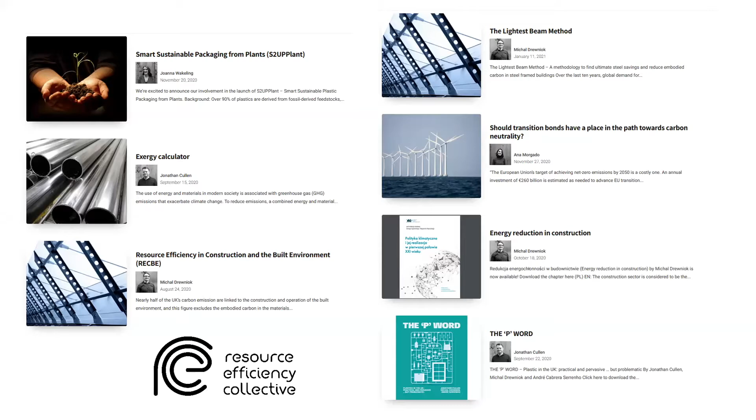We have a website, the Resource Efficiency Collective, and there's quite a lot of information on there about RECBE. If you find the one down the bottom left there, you can click through, and we have all of the slides and talks from the previous meetings up online.

The idea of this, we launched it in 2018, was really about just bringing together academics, companies, people in the construction and built environment space to talk about interesting research and what's going on, to do these workshops a couple of times a year, and to build collaborative research projects between people, not in a particularly organized way, but just by meeting people.

And lots of companies represented, many of you who are on there. Apologies if your logo isn't on there, but lots of companies working with us.

Agenda for today: welcome from me, and then we're going to move straight into hearing from Velenturf and Poole, doing some discussion after that. We've had some speakers drop out because of COVID, as Michal said, so there's a bit more time for discussion at the end, so that'd be great.

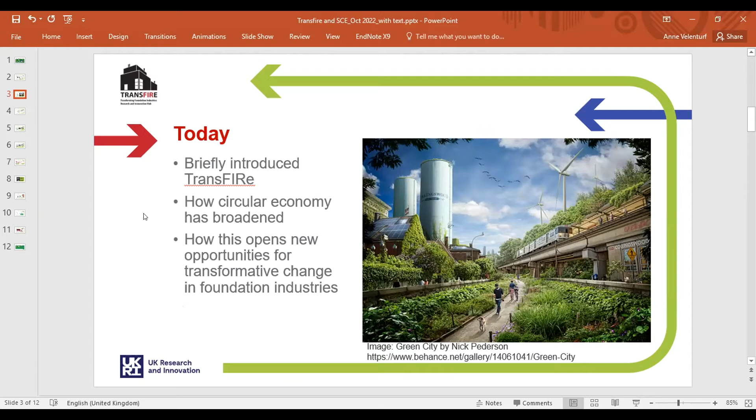So today I'll speak about what this transformative change includes from a circular economy perspective and what opportunities such transformation opens for companies. Circular economy has been defined in as many ways as there are people working on it, but there are a few commonalities, thankfully.

It's of course the opposite to a linear economy, in which we take things from the environment, make something from it, use it for a short while, and then dispose of it, often in unsustainable ways. In a circular economy, we aim to make better use of those materials, components, and products that we make from them.

In my view, that has to include minimizing resource input from the environment, maximizing waste prevention, and then optimizing environmental, social, material, and economic values of products, components, and materials throughout their consecutive life cycles.

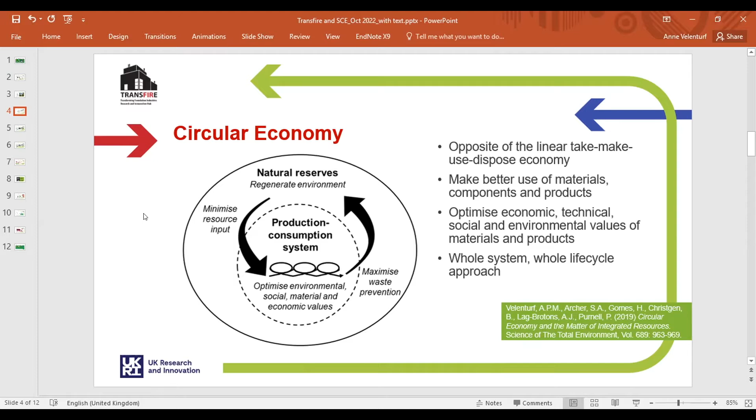So when we say optimizing, we're doing that usually for some purpose, and in a sustainable circular economy, that purpose is to increase social well-being and environmental quality while maintaining economic prosperity.

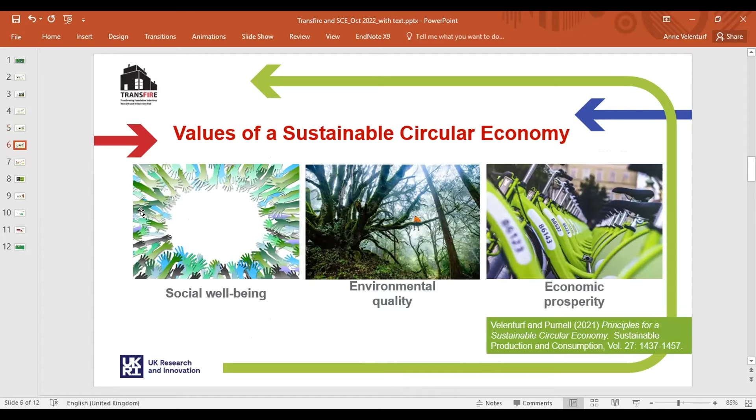And if we do that, there are lots of benefits we can realize together. For example, in the UK, we could generate nearly 500,000 jobs by 2035. Many of these, about 300,000, would be in remanufacturing. Whether we will get there with this government, I suspect it will be heavily thrown off track, but hopefully it will still be possible if we get a different political climate.

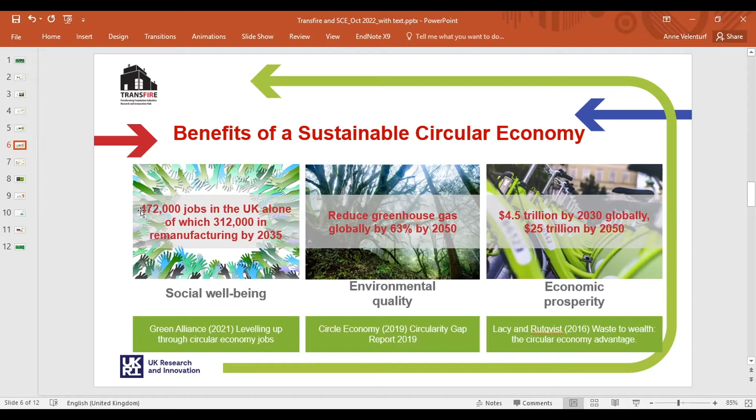There's also high potential to reduce greenhouse gas emissions globally—it could reduce by more than 60% by 2050. And it can generate very substantial business opportunities. Now, these estimates vary greatly, but in any case, they are incredibly substantial. That is certain.

So circular economy can be implemented through a number of different groups of strategies. The first is about narrowing resource flows—reducing the amount of materials we have in society as a whole. We can achieve that through better design, for example modular design, design with less materials, but also shifting to business models where, instead of selling products, we rent them out or share them.

Then there's slowing resource flows, which is about extending the amount of time between when a product is produced and when it goes to waste. There are various actions we can take there, such as component reuse, repair, remanufacturing. There's a whole list of dozens of R strategies, but I think these are the most important ones.

Then there's closing loops of resource flows, which is essentially about recycling materials and strategies such as industrial symbiosis. It's also important to recognize that it may not be possible to keep circulating resources within our society sustainably forevermore. Sometimes we'll have to reintegrate materials into natural processes, and that has to be possible in a safe way—that is what the last group of strategies is about: reintegrating resource flows.

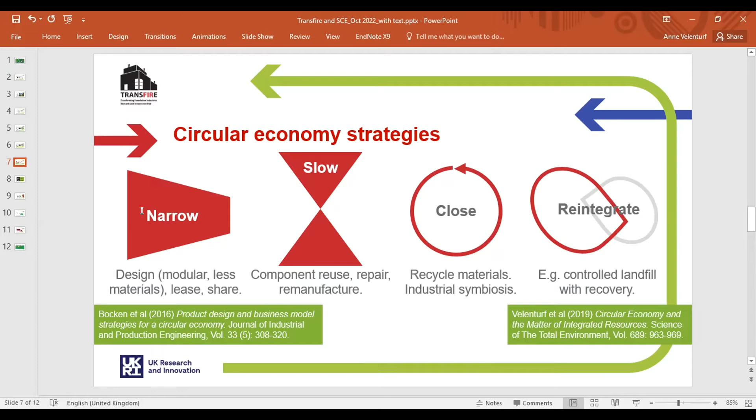Within the circular economy community, there has been a tendency to focus mostly on recycling, unfortunately. While these strategies will help improve current production and consumption practices, and fit well into a focus on increasing resource efficiency with new technologies, while that is positive, it largely leaves production and consumption processes unchanged.

And with a belief that economies can continue to grow, but in a green way. Green growth relies on decoupling resource use from GDP growth. But scientific evidence has shown that decoupling is not happening sufficiently, it's not happening fast enough. In other words, empirical evidence suggests that green growth is very unlikely.

As a result, a growing part of the circular economy community is looking to enable deeper transformative changes to our economy and our behaviors. The key difference between those mainly focused on recycling and those aiming for a sustainable circular economy is that the latter have added a major focus on dematerialization.

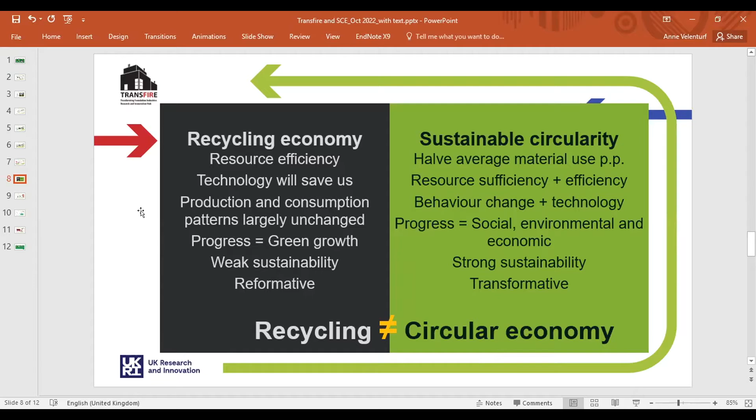Given that 75% of the materials in our economy come from foundation industries, the impact on those industries can be really substantial. But remember the massive opportunities I mentioned earlier in terms of business opportunities, jobs, and for the environment. So TransFIRe is supporting a shift in gears in the foundation industries from reforming to transforming, as indicated on this image.

We do support reforming of practices, because this is what we're starting from. We're doing that by minimizing resource use in manufacturing processes and supporting innovative industrial symbiosis. These are mostly technical changes that can substantially improve the current models of production, and that is really important too.

But at the same time, it's important to continue to move towards transformation as well, in which we are rethinking more radically how we can change our production and consumption models. It starts from asking, why are we actually producing and consuming in this way? Can our needs be met in a different way while generating more value for people and environment, while maintaining our economy?

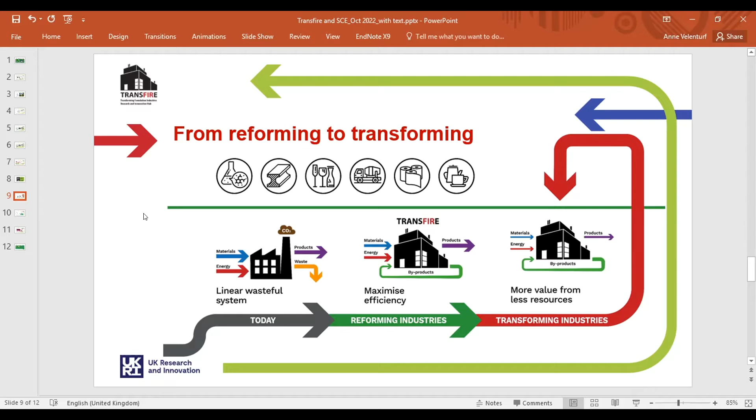Based on extensive cross-sector context analysis that we've carried out with the TransFIRe team, we found that investment is one of the major challenges for transforming foundation industries.

Currently, foundation industries in the UK are competing globally, producing against ever smaller margins, and this leads to a race to the bottom. There's a lower likelihood of investment in UK sites, for a number of reasons. Sites tend to be older and less productive. Trade arrangements are uncertain. Costs can be higher due to stricter regulations and energy prices. And capital availability can be low in the UK, while innovations in the foundation industries will cost billions just to modernize sites in the UK alone.

It seems unlikely that UK sites will outcompete sites in, for example, Asia or mainland Europe, under the conditions of sticking to the same business model. In other words, staying on the same pathway by only reforming practices will postpone loss of foundation industries in the UK, but it will probably not stop it.

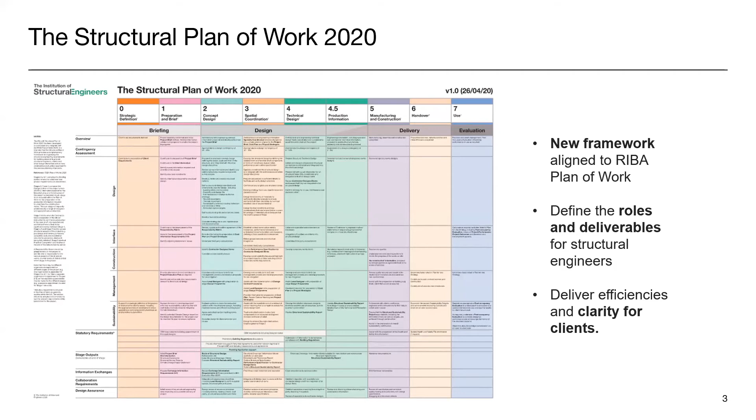It's a template report to add project-specific information based on work undertaken to increase the sustainability of the project. This comes about because a couple of years ago, the IStructE released the structural plan of work 2020, aimed to provide a new framework which aligns to the RIBA plan of work but gives specific information to structural engineers, defining the roles and deliverables at each stage, and mainly providing clarity to clients on what we should be producing and why. For a while we've gone through different practices doing different things at different stages, and it's incredibly hard for clients to understand what they get and when, and to develop consistency across the industry. So that's the background to the structural plan of work.

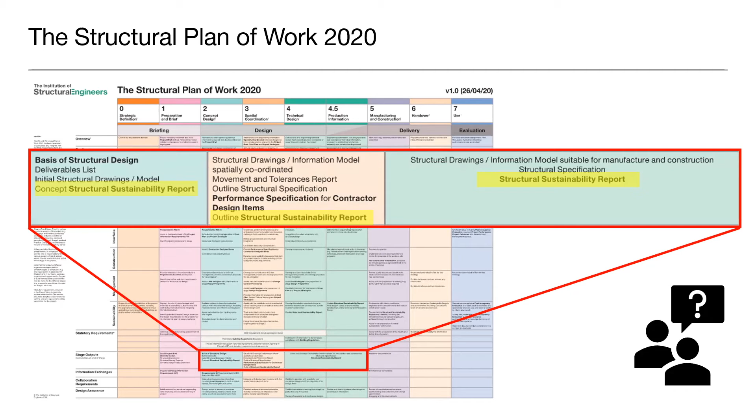The aims of putting the template together were in response to the need for engineers to do something but not necessarily knowing how. The template provides a standard scope for sustainability reporting, trying to get uptake across the industry, so doing it consistently and saying consistent messages to clients. From what I've seen over the last few years, there's been a lot of different messaging and different assumptions people are using, so I think it's really important that as an industry and a profession, we're giving the same information to our clients.

The next thing is to provide best practice. I'm discussing the IStructE here, but across industry there's been so much publication and output in this space in the last few years, it's sometimes hard to know where to go. So the idea was to bring together the best guidance produced over the last few years into one place. The next part was to record design decisions, principles and development that are driven towards a sustainable structure - this is really the detailed report.

The next point was to inform those constructing, retrofitting and deconstructing the structure about what we did in the design. Something we often see is that in design team meetings and as the design progresses, you'll have the best intentions, but it can go wrong if decisions are made at the last minute or those constructing the building don't know the intention of the design. This is particularly important with the circular economy in terms of, say, how you detail your steelwork connections, so it could be dismantled in the future, for example.

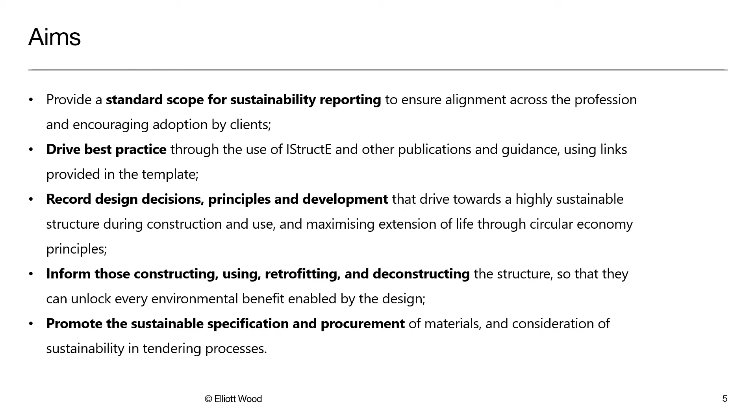And then finally, just going into the construction stage, promoting sustainable specification, procurement of materials. I don't want to get completely into discussion about concrete and steel and low carbon alternatives and everything, but there's a lot of mismessaging out there at the moment, so we're just trying to give everyone the same information and present it consistently to clients.

I won't go through the entire report, but I'll just show how it looks and the format of it. In general, we've structured it so that there's a lot of text in there already, which we've written, hopefully usable, so people haven't necessarily got the resource or time to write this from scratch - they can just take what we've written and adopt it if they need to, but it explains what the report is talking about. Then we've got placeholders where everyone can input their project-specific information.

Finally, in the comments of the report template, there's a list of guidance and general recommendations of what should be put in each section, so as you go through it, especially the first time you write it, you know what you should be writing and where to find things. For example, looking at the client's ambition and policy requirements, directing people to look at ESG statements the client may have made, local policy requirements on carbon reporting, statements, etc., so everyone understands the wider context of what they're doing.

So I'll just briefly go through the sections of the report and what kind of things are in there. We wrote an introduction section, which is largely there just to be copied and pasted - just informative really, and setting the scene.

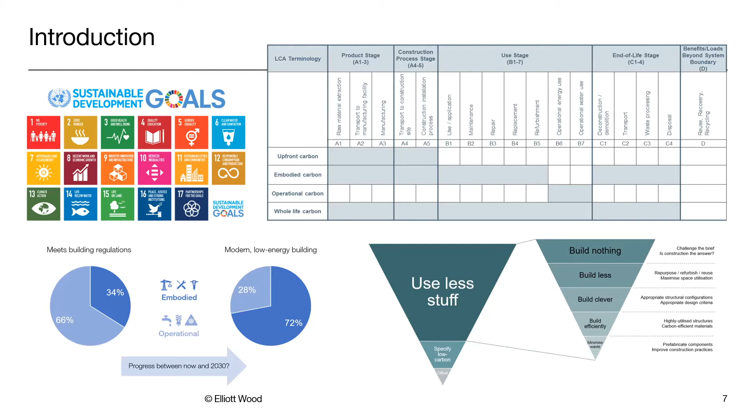We're touching on the SDGs, then go into more detail about defining carbon and the life cycle assessment, a brief overview of the importance of embodied carbon and the increasing importance over time as we decarbonise operational energy, and then finally introducing the actual hierarchy of use less stuff, and that kind of build nothing, build less, build clever approach.

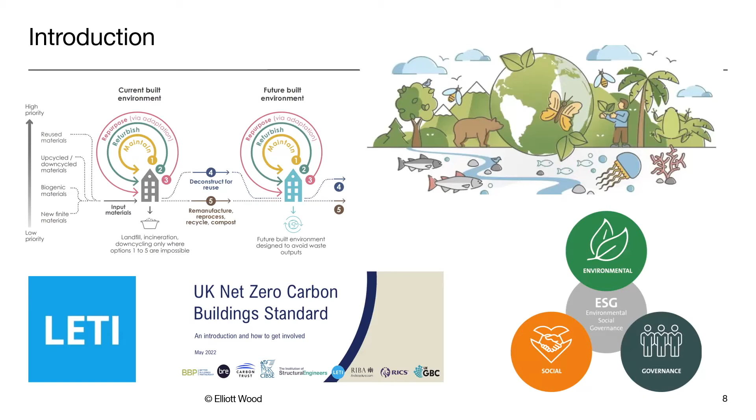And then going into a bit more detail about the wider sustainability considerations, so circular economy, obviously, and biodiversity considerations. And then finally, the section - we gave an example at the end of the introduction - we just got a bit of information around thinking about what the targets are for the project, drivers, ESG commitments, standards, and targets that the client might be going from.

The next part of the report, we've written it in a way that it's not necessarily tied to one stage - it can be used at any stage of design, either 1 through to 5, but it's written in a way that you fill it out as you go through.

So this next section is mainly aimed at the key decision-makers, where you're making the key decisions on the brief and how you deliver a structure to meet requirements. In this section, we just gave an overview of the key structural decisions that need to be made and the considerations that can be made early on to reduce carbon.

So we talk about structural grid, obviously reducing the space between columns being a significant benefit, trying to reduce the amount of basements and the amount of work we do underground because of the additional carbon intensity, considering floor heights and making sure there's an allowance there to make an efficient structure, so as not to be pushed and squeezed into doing something inefficient.

Then talking through column alignment, so trying to avoid transfer structures, which again are very inefficient, and cantilevers in a similar way.

And then discussing loading and serviceability requirements, trying to get those right early on so we're not over-designing our buildings unnecessarily because we're over-specifying what they have to be designed to.

And then a section also on materiality, so getting the right material in the right place, which is where we often go wrong right at the start of the project as well.

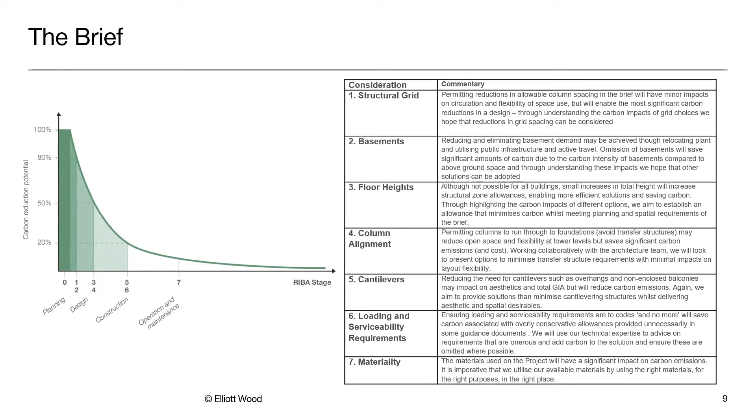And then we go on to discuss what we term more whole life cycle considerations. So this is where we discuss whether reuse is feasible, whether the building - if there's a building on site - how much of that can be reused, if not, either the materials locally or that can be procured to reduce the amount of new materials used on the project.

Again, thinking a lot about materiality, and then also thinking about flexibility and adaptability. I think historically the way we've approached buildings is to put a 5 kPa load everywhere and try to open up the columns as much as possible and say this can be used for many purposes in the future. But a much more targeted strategic approach to adaptability can achieve much better results at much lower overall carbon costs.

So think about - are there places in the floor plate or in the structure where you could potentially strengthen in the future if needed, or where you're allowing extra capacity for different purposes without over-designing everything.

And then similarly on durability and circularity - this is another area that's often hard to understand and develop as a structural engineer, because for a more durable structure you might need to put more material or more carbon in initially, but that might be suitable for a structure that we know is going to be around for 60, 80, 100 years.

Whereas if you design a structure where there's a lot of uncertainty around its use going into the future, then you really need to think more about how it may be reused and adapted in different ways, taken apart, made smaller, made bigger, etc. And I think that's a really important thing to get right for the project.

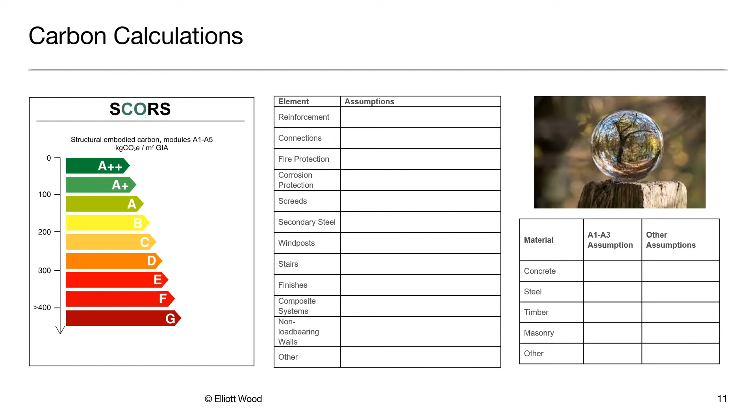The next section builds on from setting the brief, which was kind of the overview of a lot of this stuff. This is then filled out, the design approach, more through RIBA stages 3 and 4, in terms of how the designs actually look to achieve the brief.

So going into more detailed consideration of the criteria set, considerations around the loading used and the serviceability criteria. This isn't meant to just repeat what we already produce in our reports, where you'll have a three-page table of all the loads considered, but to consider some of the key parts of it and what that means for sustainability. For example, you may have increased loads to allow for future adaptation, or areas where it's more suitable to apply stricter vibration requirements, either for future or current use. It really responds to the use of the building.

Consideration of other disciplines - I think often we think in quite a siloed way, but there are times when we might need to increase structural material to help reduce material in the facade, or to reduce the amount of services that go through the building. I think that's worth capturing in our report, so we become more aware of it, and think a bit more broadly about the decisions we're making.

And then finally in this section, discussion of solutions and configuration of the building, focusing on the sustainability aspects and the bits that matter for that, rather than the detailed structural stuff, which will be in the design report anyway.

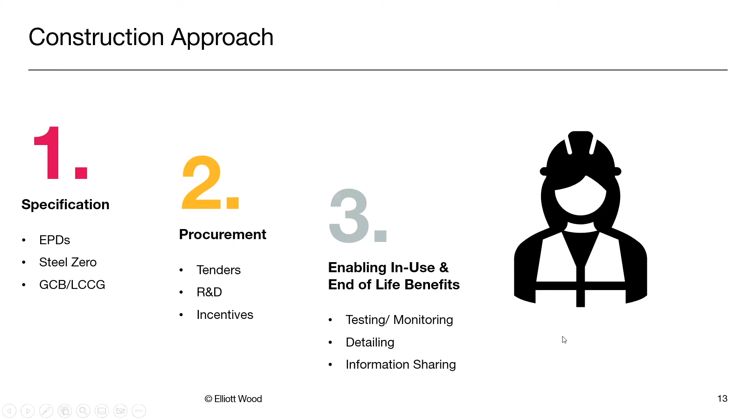So can you give the steel fabricator your model and they can design the joints, the actual forces and moments that go through those joints, rather than us rounding everything up, rationalising everything, and then over-designing all the connections in the structure. So yeah, that's basically everything.

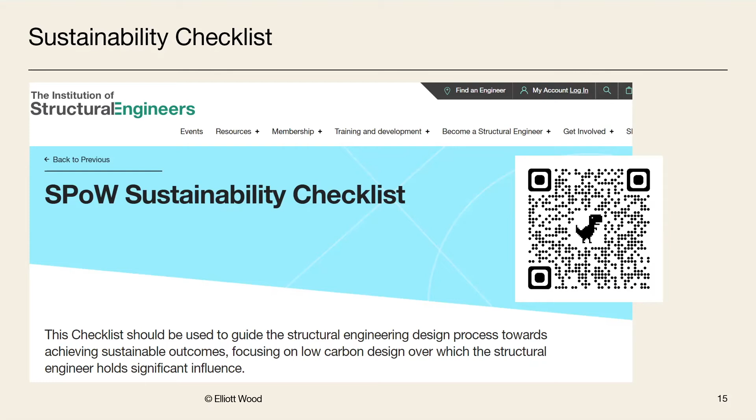Alongside the report, we produced a checklist. The aim was to make sure that, at least in the initial stages, people aren't going in to write a report at the end of the stage and then find they don't have anything to write because they haven't considered anything. It's really useful guidance, available online as a single page with drop-downs, and it talks through the entire process - what things you should be considering at different stages, and what's a good resource to read if you don't know much about it. I think it's a brilliant place where engineers, and others, can go to find out more and understand the key things they need to consider.

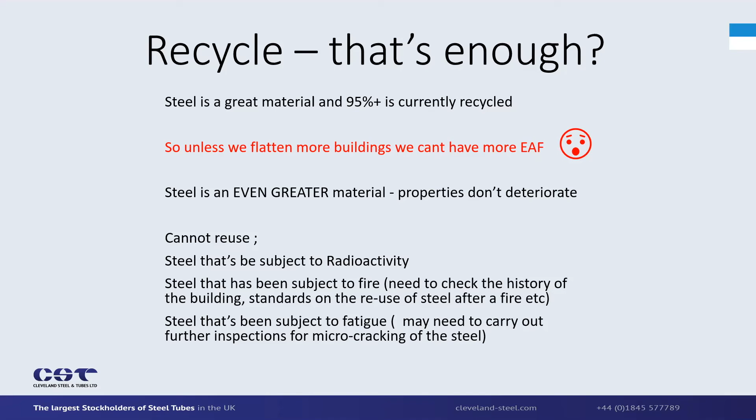So reuse is the quickest current solution where it's available. Steel's properties don't deteriorate if it's protected from the environment and you don't cause it physical damage, radioactivity, fire, fatigue, or basically mangle it when taking it down—that's another factor. But steel is a great material, identified as such to be used again and again. The basic maths: it's more or less agreed now that reusing steel can save 95+% of its carbon.

There's an EPD from EMR. We've done work with Elliott looking at the carbon cost of reused steel, the recovery of it. The carbon cost of demolition wasn't included particularly because the building's coming down anyway, so it can be viewed as a sunk cost, but the numbers are very low—60 kilos a ton down to as low as 20, depending on how much reuse activity is required. Compared to blast furnace steel averaging a couple of tons, or electric arc furnace between 0.3 and 0.7 depending on whether it's XCarb or normal materials. So there's big numbers available to be saved in steel reuse into projects.

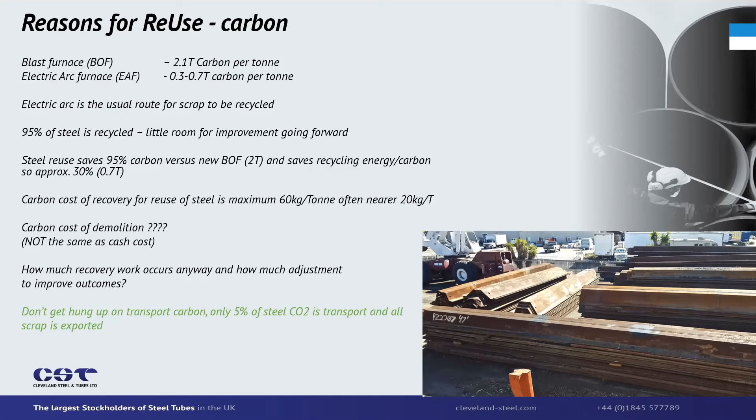I've made the point here about transport. Steel's carbon footprint isn't essentially dependent on transport cost, and people seem to want local product onto local projects, but steel is moved globally, and so is scrap. So if you reuse the steel, you prevent the scrap from going to the local scrap man, to the port, to Turkey, India, or wherever it goes from there and then duly back again. We're also creating local employment, businesses and benefits.

In terms of steel reclamation, I always like to make the main point that words matter when you're specifying it. We can still demolish and recover materials—it's about the recovery of materials, not necessarily deconstructing, because that's perceived in the demolition industry as a spanners, nuts and bolts type activity, which jacks up the effort, time and cost. So it's a question of what materials we can get out the quickest and best. Don't create work for work's sake, and don't try to recover materials nobody wants.

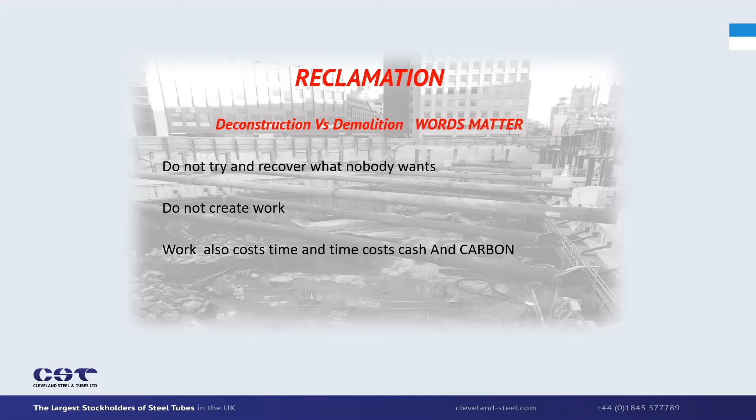In steelwork terms, the obvious example is connections. We're not at a stage of modular design where people take something down and put it back up as it was. So if we spend a long time trying to unencase end connections and unbolt them, we've recovered something nobody wants to buy later, whereas it could just be smashed out or chopped off above the concrete. It's that kind of principle—it needs to be thought about at the time.

Money is always a factor. The first and most important point is how volatile steel prices are—and I don't just mean because of the Ukraine war. We were selling material in 2012 for the same price we sold it for in 2022, but the average in between was 40% lower. For my product, we were selling it at 1,100 quid a ton back in 2012, and still 1,100 quid a ton at the back end of 2021, but the average for the decade was 650. Scrap's even worse.

Scrap has been down as low as £16 a ton and as high as 450 this March. So within a very volatile market, you have to accept there are different opportunities. If steel prices are poor and scrap prices are high, and you do a hell of a lot of work recovering it, it's about break even.

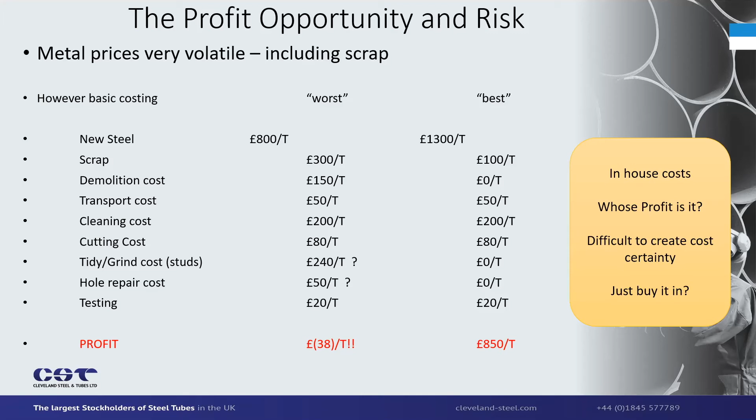So then the argument is about the cost, it's about the carbon cost. However, if steel prices are high, which they are currently, if scrap were lower, which it isn't, you can see there's potentially a very large saving available. But it's about doing the work that recovers things efficiently and economically and sensibly, as opposed to recovering everything. I'm not of the opinion that trying to reuse everything is particularly sensible.

So to sum up the advantages there, we've got the cost, if the job's well managed, we've got large carbon savings, we create a local resource, which in the current climate, particularly with energy, but with everything else, a lot of UK steel is imported from abroad. Clearly the material available for reuse is here already. And in reusing it, it is quite labour intensive, and there's a lot of technology and business to be developed in the reuse market to push things forward. There are ourselves and others now doing this, but I'm sure it'll grow far beyond that.

In terms of steel reuse, design is critical. In the primary instance, don't set unrealistic targets. The buildings can't be built out of 100% reused steel at the moment. Make sure your specification is for the building that you want, and then allow for reused materials to go into it. And I would say that applies to any material, not just steel.

Because any reuse that we get is helping the situation. If the specifications are too tight, the supply chain will rely on that to basically thwart the efforts of circular economy and green aspects later on. If they're too loose, I suppose that's a problem, but you have to be mindful that the spec should allow for reuse where it can occur.

So in that regard, design the building you need and then try and reuse. It's not a very good idea to try and find the material and then design a building out of it. I'm seeing that a lot just now. People at RIBA Stage 2 wanting to source materials that they hope are going to be used by the time the building goes up after stages 3 and 4. The design cycles tend to make a bit of a mess of that.

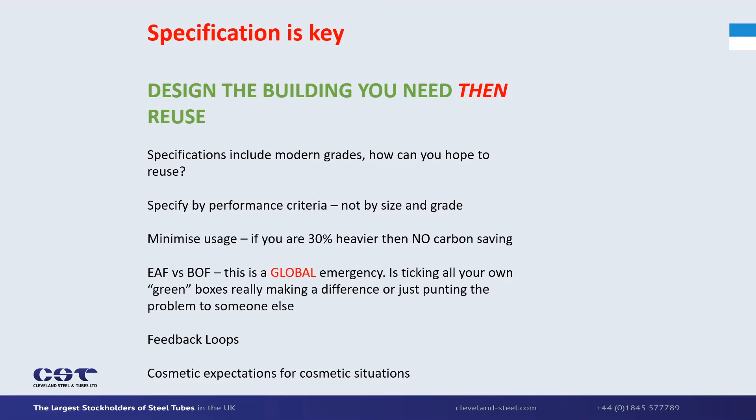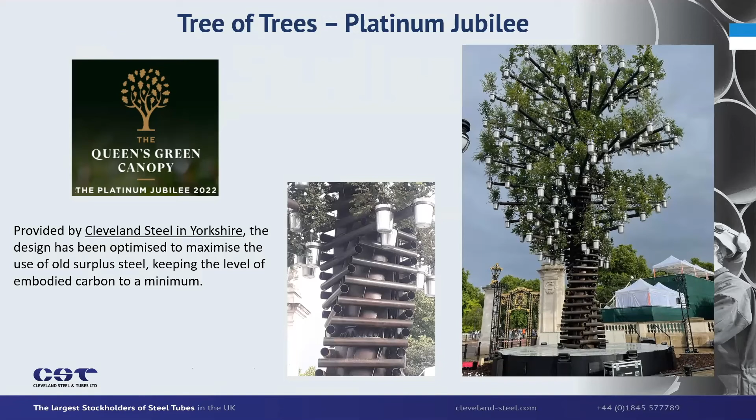In terms of case studies, which I was asked to provide, I've got to put this one on because we loved it. The Queen's Green Canopy, the Tree of Trees, was actually made from our repurposed and reused products. Weirdly, it was never marketed as such, but that's a different issue.

Simple reuse, I think this is critically important. People don't make allowance for the fact that we have to have material in order to sell it, and people knocking big buildings down in London have a habit of only reviewing them from the perspective of what could they use them for. That's not particularly relevant. If you can get the materials out, there will be a market. If the reused material substitutes new, there will be a carbon saving.

If we're about circular economy, it shouldn't all be about it landing on our own projects and our own jobs. I can take pretty much any piece of metal and find somebody that will buy it for an application that would otherwise have used new.

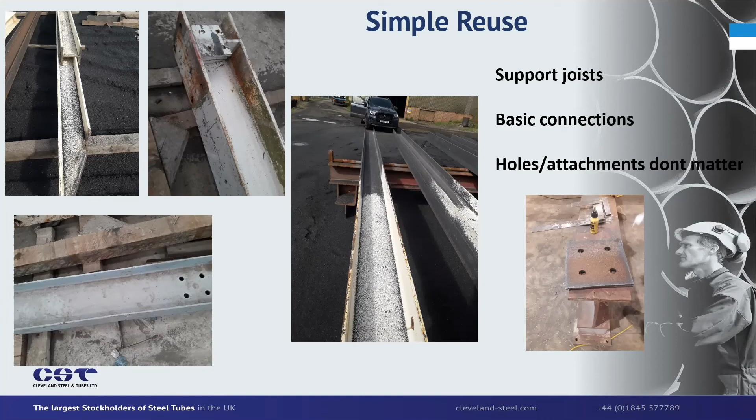So in this instance, this is a domestic project. An architect wanted a green development at home. They were knocking a load of walls out and needed steelwork to hold the roof up. Ignoring the fact it was the most colossally chunky steel I've ever seen to stop a 4-bed roof dropping in, because they were so obsessed with deflection, the truth is they used reused steel rather than new. So there was 3 or 4 tons of carbon saving just in one domestic renovation, just on the steelwork.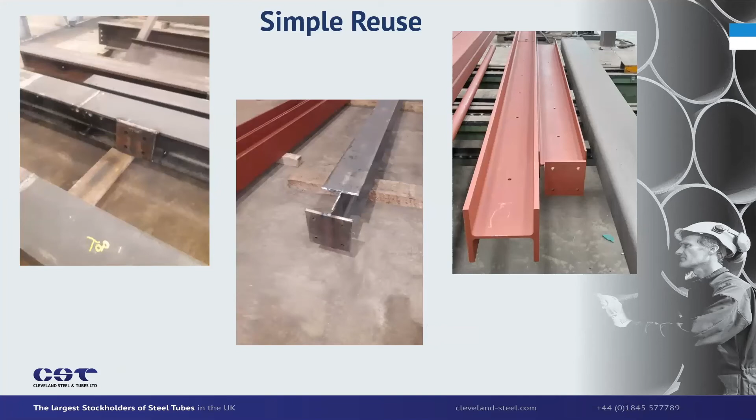This is another simple project, Packhorse Bridge in the Yorkshire Dales. The bridge was condemned because the farmer had been running modern vehicles over it, and it was all going to collapse in the river. So we were able to provide simple pieces of reused steel to rebuild the deck, to make the bridge almost hopefully bomb-proof for many years to come. Again, simple application, but we need material coming out of the market to do it.

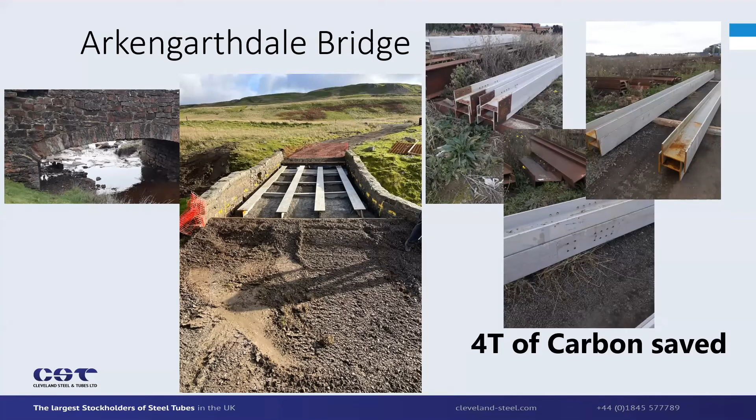Holbein Gardens, I think this one's been all over the press, but this is another project I love because it was hybrid. They didn't decide how much reused material to put in the job, they just decided they wanted as much as possible. They had some material available, they bought some from us, and the rest we bought and put in as new. But it was really right up until the point where we did the fabrication, where we were putting welding rods to it, that they would allow us to change a new section for a reused section, because there's no reason to distinguish between new and reused in the design unless there are specific aspects or defects that need to be taken into account.

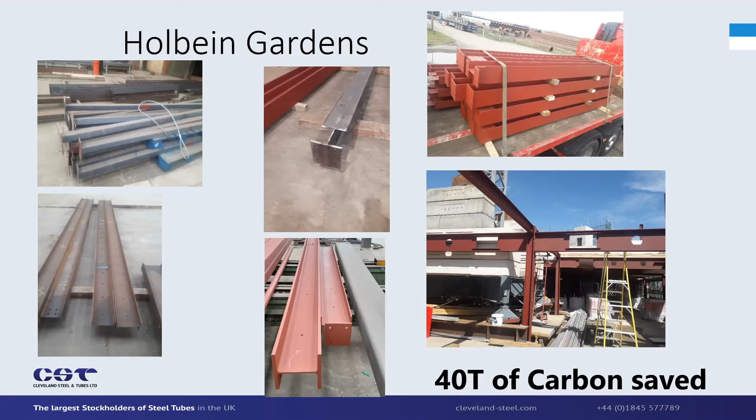So this job actually went very well, and I think it's going to be a big feather in the cap for Grosvenor Estates when it's finished.

This is much more basic. This is a wind turbine foundation. 1,400 tons went under the wind turbine, and this was all repurposed oil pipe that came from ourselves.

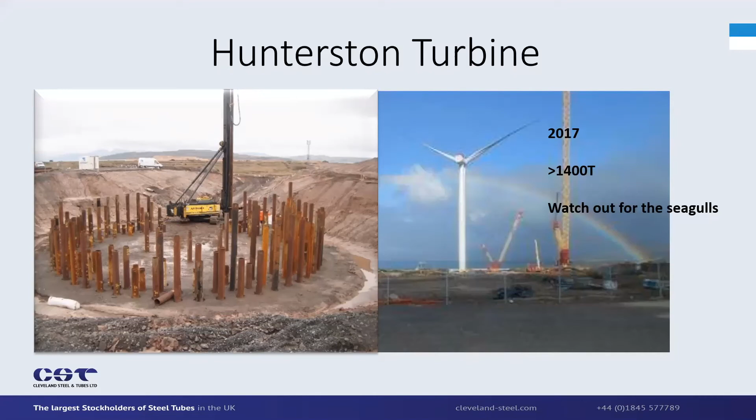Props and temporary works are actually a very good source of material, but also a big user of material that's often hidden from the construction costs. The demolition guys are now actually reviewing steel coming out of buildings to see if they can use it in their own temporary works or shoring works for things like basement developments. I know at least 2 of the big players that are now reviewing materials available to them from demolition to see if they can utilize them at least in the temporary works. So these things are happening.

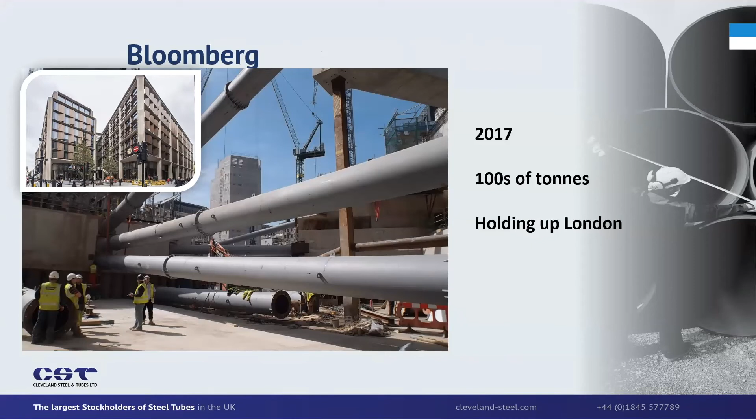Then we've got the Olympic Stadium, which is a very old headline act of ours now, but 2,000 tons of unused gas pipe that wasn't going to be sold elsewhere was used in the Olympic Stadium.

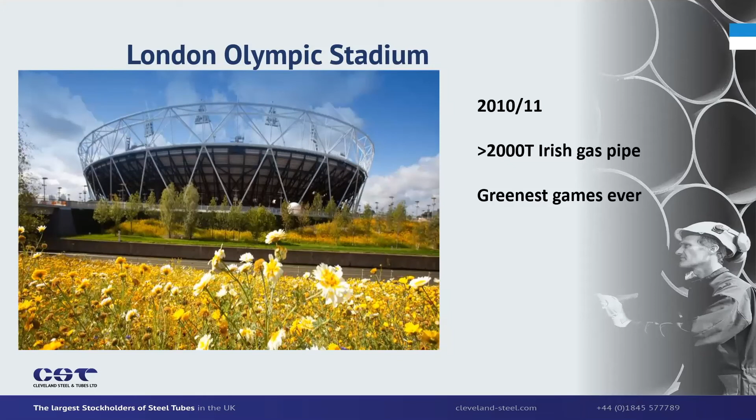Our own building, a reused frame where we refabricated and repainted it, we were actually able to save 1,500 tons of carbon and nearly £1 million, 25% on the job. But that was also combined with being intelligent about the muck shift and also using road planings. They were scalping the A19 and resurfacing it, and we got 30,000 tons of those scalpings onto our site and substituted them for quarried stone. It made a significant difference, but the real point of this job is it was our job, our money, and we were in charge of the whole process, so we were able to dictate how that panned out.